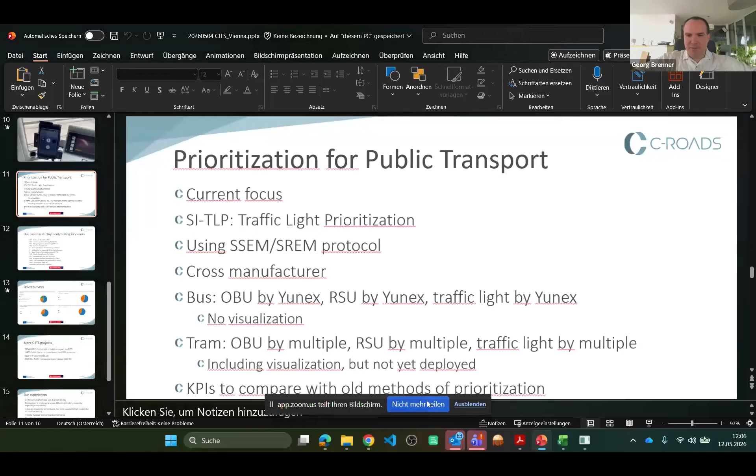Thank you very much. Very impressive presentations already. I think it's clear that C-ITS has already reached the stage where it's really taking over. It's expanding and being implemented all over the place.

So let me see now. Whoop, I started in the middle of the presentation.

Okay. My name is Georg Brenner. I'm from the Vienna Public Transport Operator. I work in the Operational Planning and Innovations Department, and I deal with the implementation of C-ITS in Vienna, which is a bit of a bigger fish to fry, let's say. We have about 2.2 million inhabitants, so it's the second biggest German-speaking city in the world. We have 620,000 commuters. We have 900 million public transport users per year.

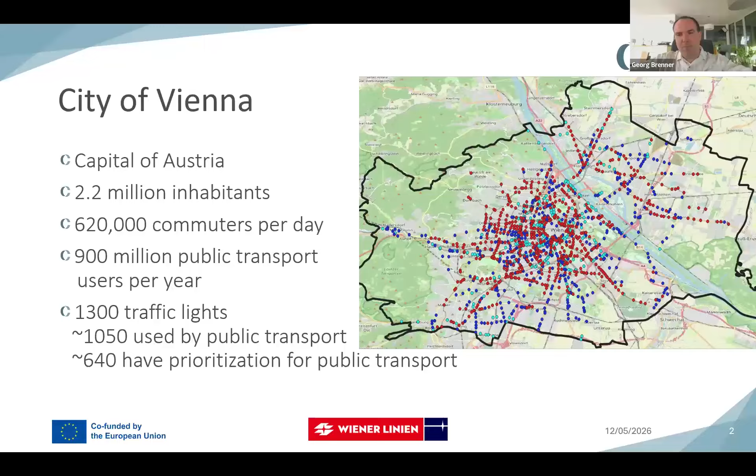We have around 1,300 traffic lights, which you can see on this little map here. And a bit more than 1,000 of those are already frequented by public transport, and 640 had prioritization for public transport already before C-ITS. So now, quickly for the company I work for, we have around 10,000 employees. We run 500 trams, 500 buses, and 700 metros. So this is what we need to equip with C-ITS.

Okay, now a bit more detail about what we're doing in Vienna, because here you can see our roadside unit deployment status on a map of Vienna. All the blue and red dots are intersections that already have roadside units. We have only a few trams and buses equipped for now. We're only testing it. That's because the environment is more complex here than in a smaller city. You have multiple providers for each level of hardware. You have many different providers for traffic lights. You have many different providers for vehicles and so on. So it's not as simple as implementing a single solution. You need multiple different solutions, and they all need to be interoperable.

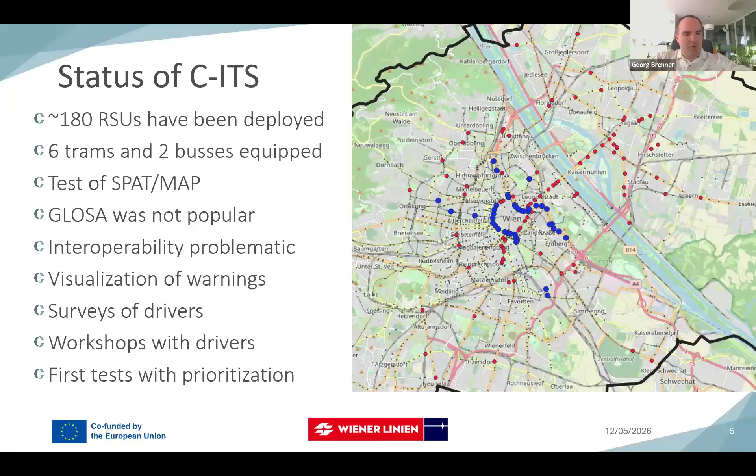And that's one of the points I made here. Interoperability is rather problematic. The communication between different companies, even though it's supposedly standardized, the standardization still needs to be worked out a bit, because the standards in detail can be interpreted differently. So we're working on improving that.

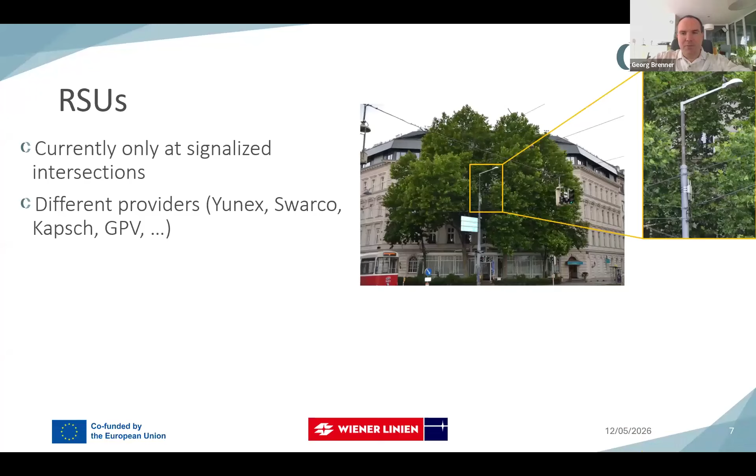I don't think I need to explain how C-ITS works anymore. We've heard that perfectly fine before. Here's just a look at some of our roadside units. Basically, they look like a wireless router, which is more or less what they are.

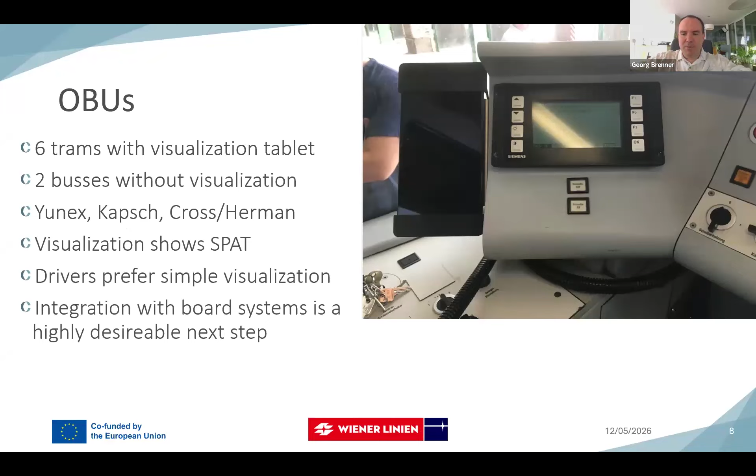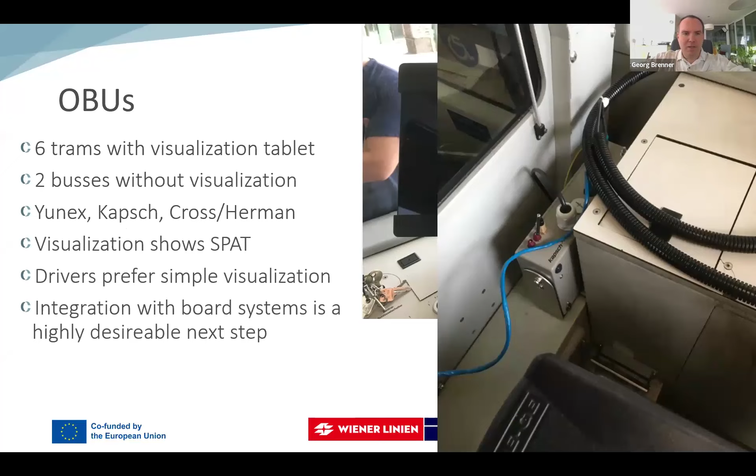And our onboard units, here you can see one that is switched off on the left. This tablet, we installed them in trams. This is the actual onboard unit, the computer that is installed behind the seat of the driver. And here you can see the antennas we put. This is just a test setup, so the antennas are still inside the vehicle.

Of course, for further deployment, they're going to be outside. But for the tests, they're behind the windshield. As you can see, there's wires in this windshield because it's a heated windshield, so they're a bit of a nuisance for the reception of the antenna, but it works pretty well.

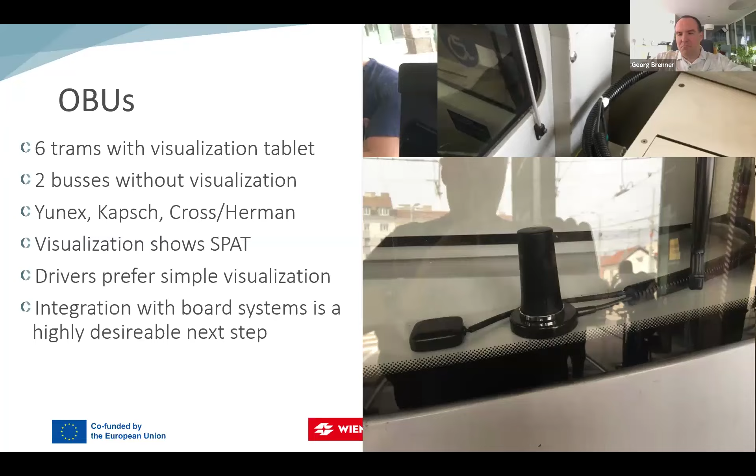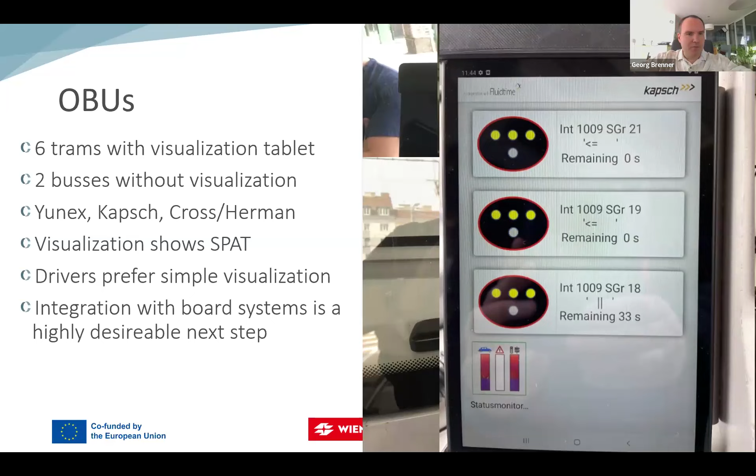And here you can see what the tablet on top would show. This is the traffic lights shown for trams, for example. You can also see those in action later on. I'm going to show a video. I hope the frame rate is good enough. For now, some more pictures.

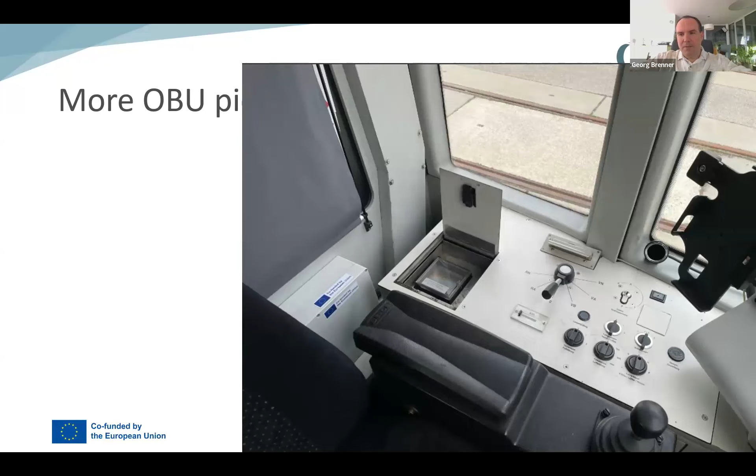Here you can see the onboard unit again on the left-hand side and a different kind of installation behind the seat. And on the right-hand side, the tablet holder, which is empty in this case. And here you can see the tablet showing the current signal phase and timing of the intersection ahead. You can see at the top the name of the intersection, below it the distance from the vehicle at the moment, and then the current signal phase and timing.

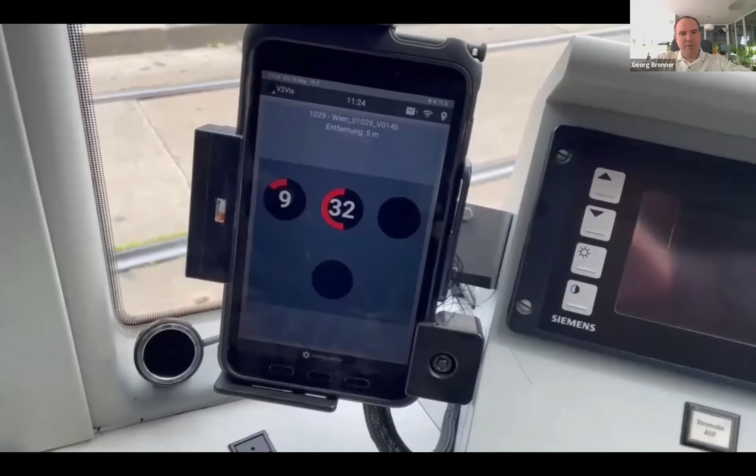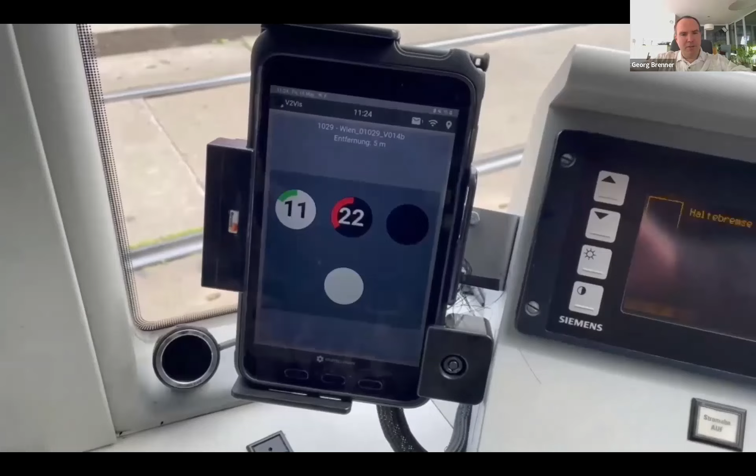And now I hope the video works. You can see in the middle is the countdown for green, and now it's switched to red. So we have 30 seconds of red right in front of us. We're standing in front of an intersection just 5 meters from it. And the relation to go to the left now switched to green and has another 10 seconds of green.

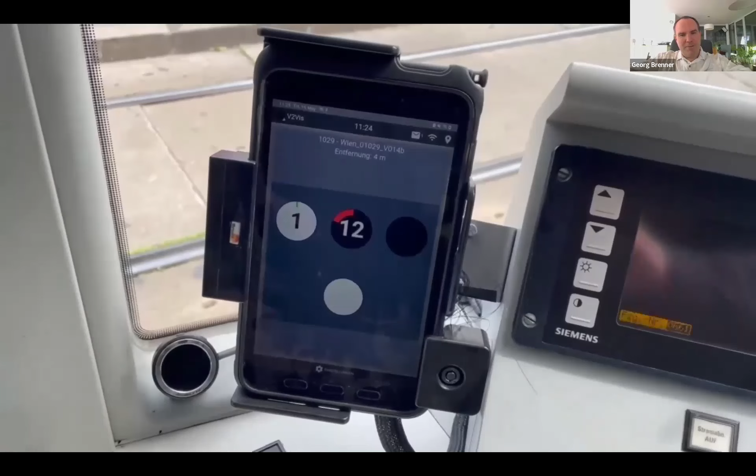And this is what the driver sees in the vehicles right now. This onboard unit, actually, this is from Ivo, who presented before me. His company provided us with this onboard unit and this visualization.

So our current focus is on prioritization. We're trying to work out a way to replace the old prioritization technologies. We have different technologies currently in the works in Vienna. We use mostly a radio signal, but also some detection models that work on a different level. They are rather unreliable. They are rather expensive to maintain. So C-ITS provides us with an opportunity here to improve the service and to speed up our public transport.

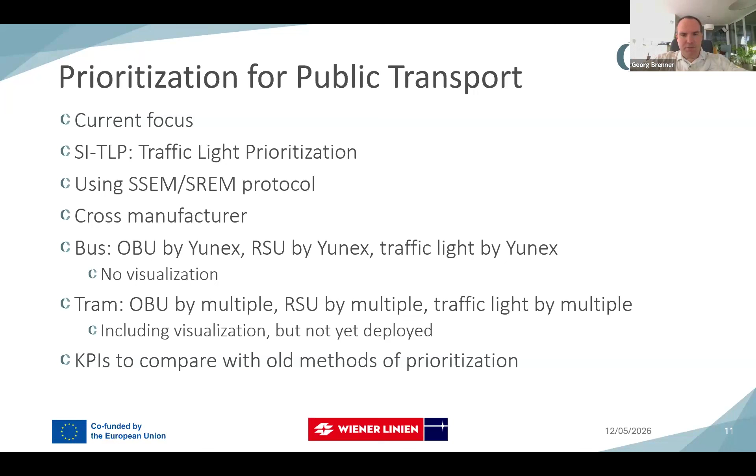What I also mentioned here is that in the buses, we currently don't use any visualization. What you saw before, this tablet, this is only for the trams at the moment. And of course, they can also show all kinds of other information, not just signal phase and timing. Here we have a few of the use cases that we're currently testing or deploying.

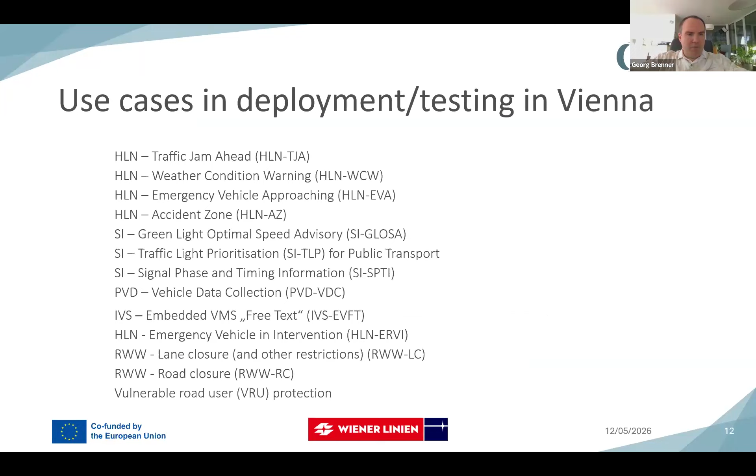I don't think we have time to go through this list, but what I wanted to point out also is what I find very important is to have a short information exchange cycle with the actual drivers. And that's why we do driver surveys. We have QR codes all over the place where the drivers can scan and then fill out the survey.

We have workshops with the drivers. We're trying to really get their feedback on how to improve the service, what information they would like. And there's also some use cases for CITS arising from that. So, for example, we're now building a data pipeline to show flexible speed limits, like adaptive speed limits, because we know that, for example, when a tram track gets damaged, the speed limit for that track is reduced.

And this is a bit hard to communicate to drivers. They get it in paper, but of course, not all of them read the paper all the time. It's more than 1,000 drivers, so it's hard to reach everybody for every spot in the entire network. So we're trying to deploy this information. This is one of the suggestions the drivers actually made to us.